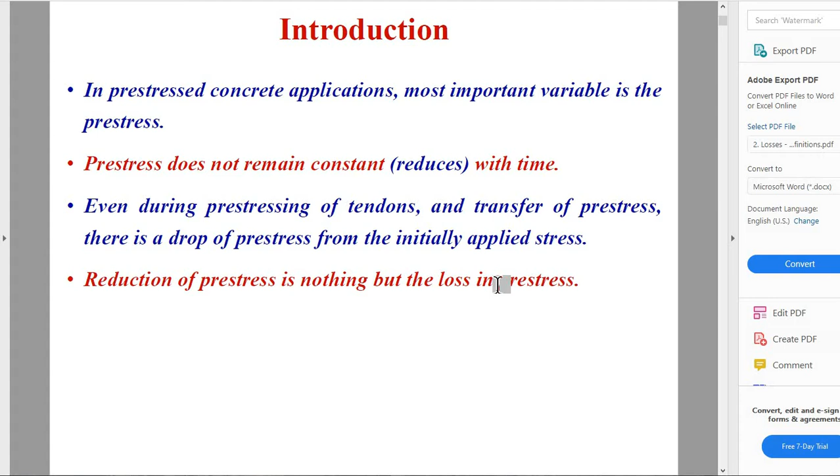Reduction of pre-stress is nothing but the loss in pre-stress. Early attempts to produce pre-stressed concrete were not successful due to loss of pre-stress transferred to concrete after a few years. Remember the word few years. So we have time-dependent losses.

Pre-stress loss is nothing but the reduction of initial applied pre-stress to an effective value. This initial applied pre-stress is the pressure obtained from the jacking equipment, which is the equipment that pulls the tendons. In other words, loss in pre-stress is the difference between initial pre-stress and the effective pre-stress that remains in a member. The effective pre-stress is the stress remaining in the tendons after removing the pre-stressing equipment and after the lock is placed.

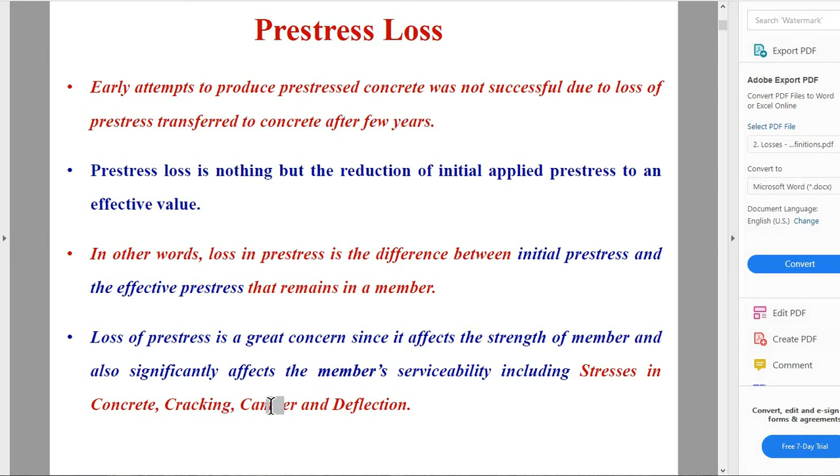Loss of pre-stress is a great concern since it affects the strength of the member and also significantly affects the member's serviceability, including stresses in concrete, cracking, camber, and deflection. When you talk about serviceability, these are terms of comfort. For example, we don't want a beam with large deflection, although it is safe. We also don't want a beam with visible cracks, although it is still structurally safe. That's what we call serviceability.

Loss of pre-stress is classified into two types: short-term or immediate, and long-term or time-dependent losses. Short-term, immediate losses occur during pre-stressing of tendons and transfer of pre-stress to the concrete member. Long-term, time-dependent losses occur during the service life of the structure.

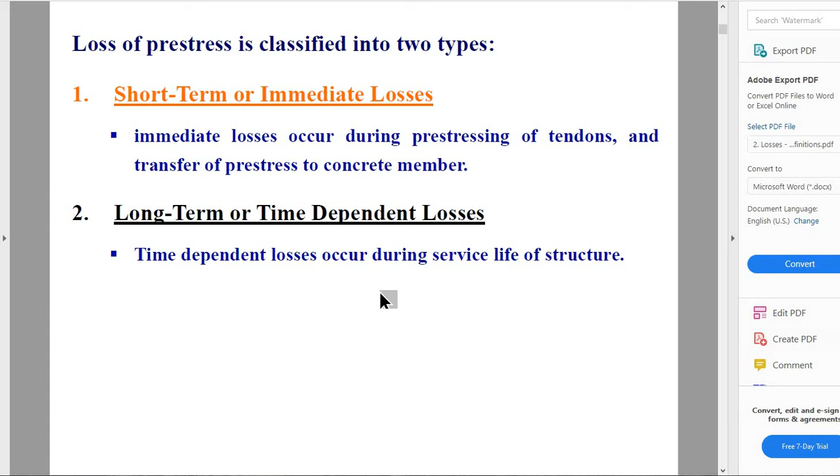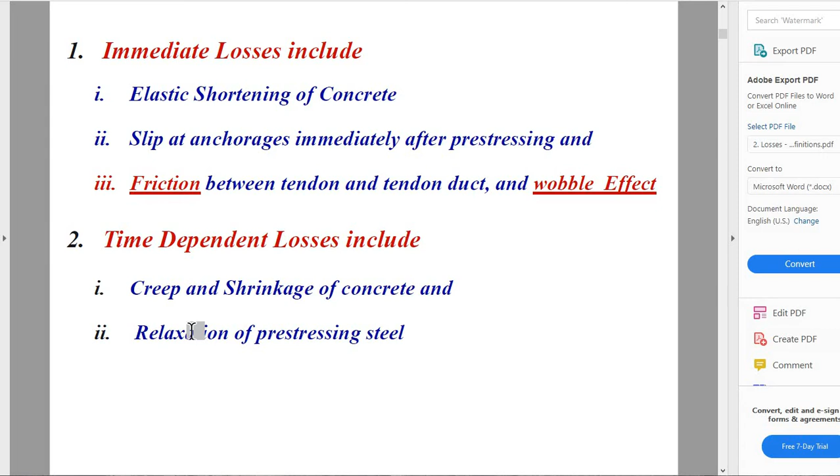Immediate losses include elastic shortening, slip at anchorage, friction between tendon and tendon duct, and wobble effect. Then we have creep and shrinkage, and relaxation of pre-stressing steel. So we have immediate and time-dependent losses, divided into two. We will solve all of those one by one.

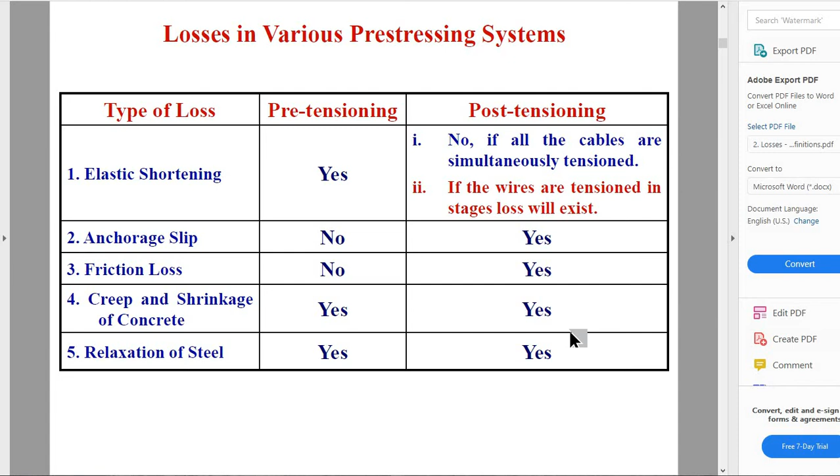Elastic shortening in pre-tensioned concrete: when the pre-stress is transferred to concrete, the member shortens and the pre-stressing steel also shortens, hence there is loss of pre-stress. This is the part where the concrete has hardened, and when you apply the pressure and cut the tendons, it means the tendons are now gripping the concrete, and the size or length of the concrete decreases. This is called elastic shortening.

In case of post-tensioning, if all the cables are tensioned simultaneously, there is no loss since the applied stress is recorded after the elastic shortening has completely occurred. If the cables are tensioned sequentially, there is loss in a tendon during subsequent stretching of other tendons.

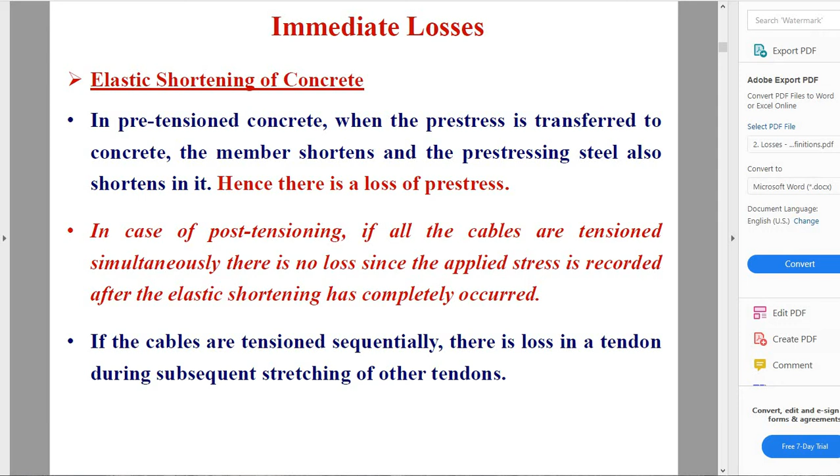Loss of pre-stress mainly depends on modular ratio and average stress in concrete at the level of steel. Loss due to elastic shortening is quantified by the drop in pre-stress in a tendon due to change in strain in the tendon. This change in strain in tendon is equal to the strain in concrete at the level of tendon due to pre-stressing force. This assumption is due to strain compatibility between concrete and steel.

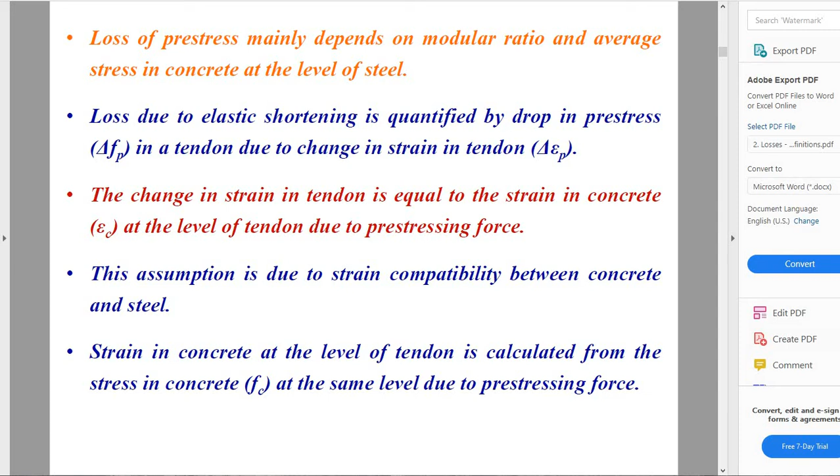Strain in concrete at the level of tendon is calculated from the stress in concrete at the same level due to pre-stressing force. Loss due to elastic shortening is quantified by the drop in pre-stress in the tendon due to strain in tendon. Change in strain in tendon is equal to strain in concrete at the level of tendon due to pre-stressing force, which is called strain compatibility between concrete and steel.

Strain in concrete at the level of tendon is calculated from the stress in concrete at the same level due to the pre-stressing force. A linear elastic relationship is used to calculate the strain from the stress.

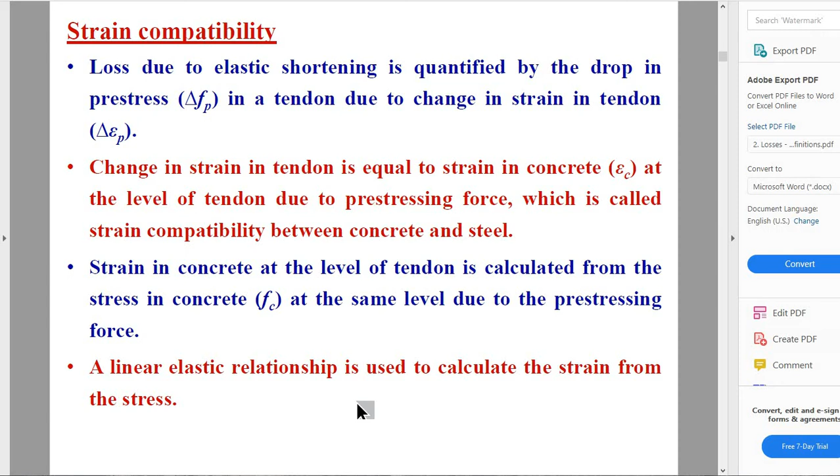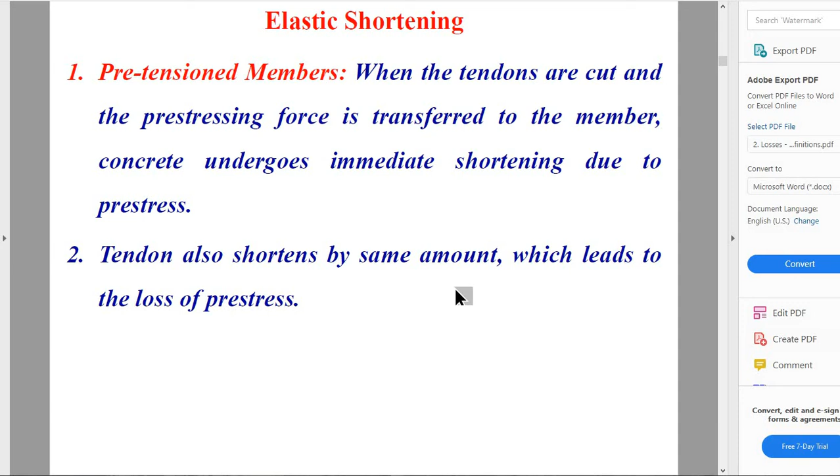For pre-tensioned members, when tendons are cut and the pre-stressing force is transferred to the member, concrete undergoes immediate shortening due to pre-stress. The tendon also shortens by the same amount, which leads to the loss of pre-stress.

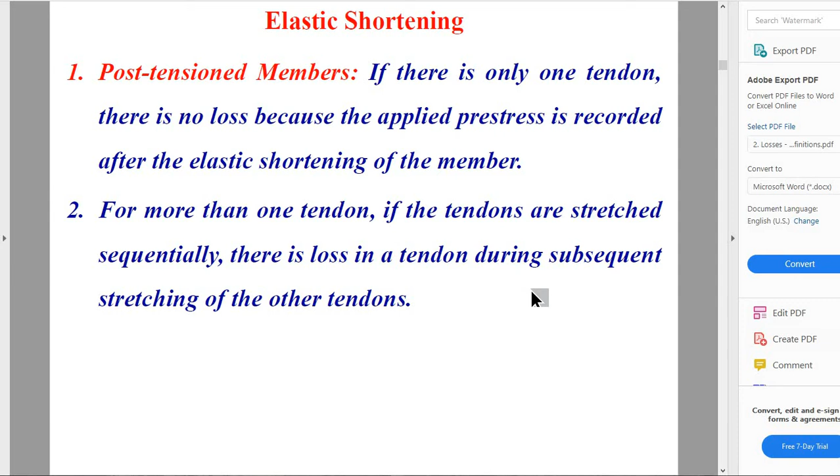For post-tensioned members, if there is only one tendon, there is no loss because the applied pre-stress is recorded after the elastic shortening of the member. For more than one tendon, if the tendons are stretched sequentially, there is loss in a tendon during subsequent stretching of the other tendons.

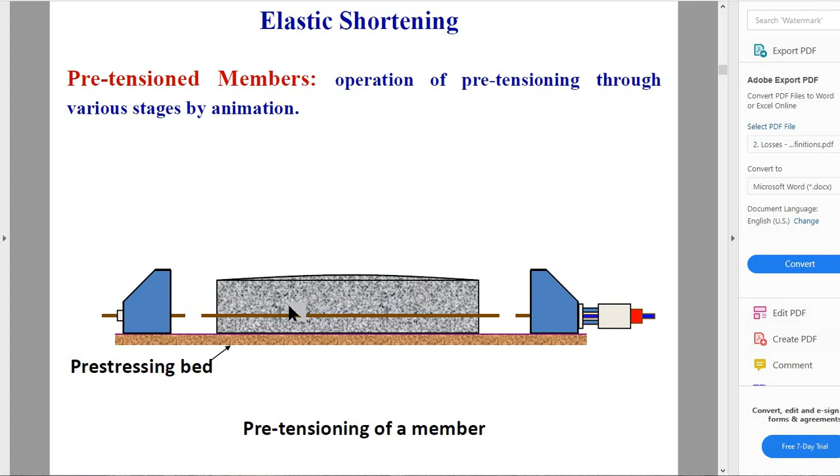That is called elastic shortening. So the length of the pre-stressing tendons also decreases. Notice that the strand is located at the bottom, at the middle of the beam, which is why you'll notice its deflection is upwards. In this other case, the tendon is somewhere in the middle.

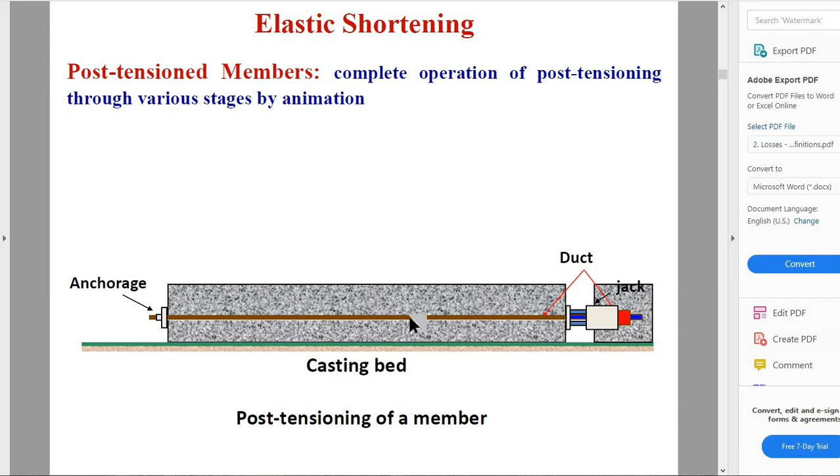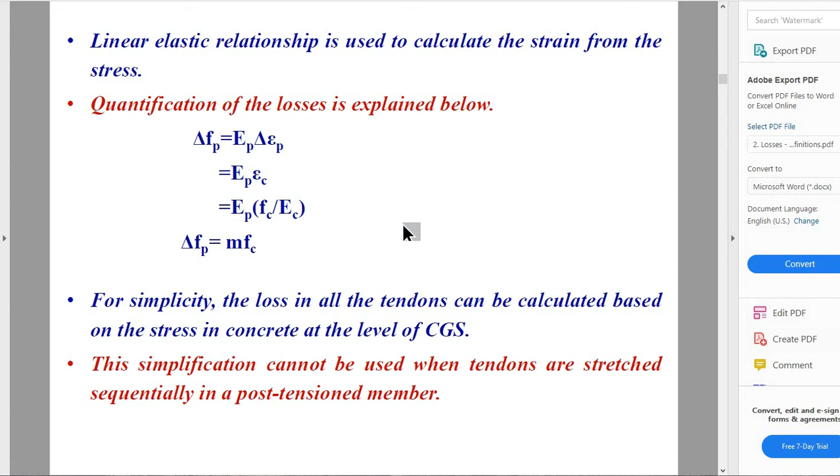Now we go to the linear elastic relationship used to calculate the strain from the stress. In our sample later, we have equations we'll use for elastic shortening.

Now let's go to anchorage slip. In most post-tensioning systems, when the tendon force is transferred from the jack to the anchoring ends, the friction wedges slip over a small distance.

These are the anchoring ends, the anchor, the mechanism or lock so that the tendons will remain stretched in the concrete. This is also what allows you to remove the jacking equipment.

Anchorage block also moves before it settles on concrete. Loss of pre-stress is due to the consequent reduction in the length of the tendon. A certain quantity of pre-stress is released due to this slip of wire through the anchorages.

The amount of slip depends on the type of wedge and stress in the wire. That's why, before locking the jacking force, they increase it slightly, because once you lock it, there are losses.

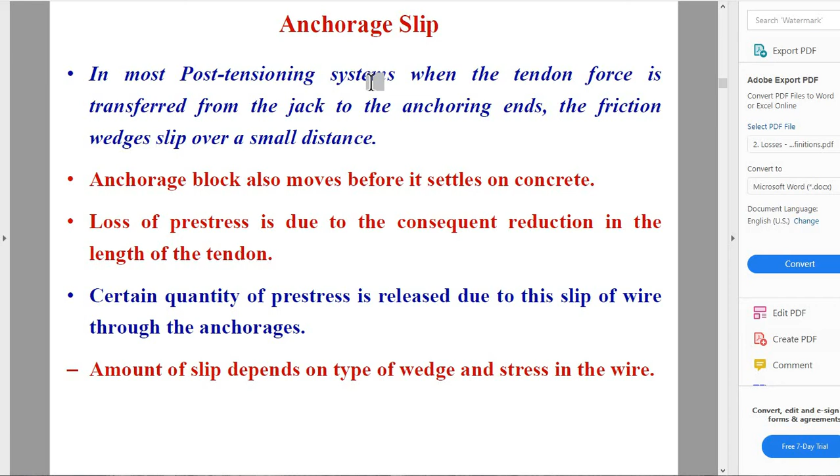The magnitude of slip can be known from tests or from the patents of the anchorage system. So each manufacturer of tendons and anchors has specifications listing these losses.

Loss of stress is caused by a definite total amount of shortening. Percentage loss is higher for shorter members. Due to setting of the anchorage block, the tendon shortens, and there develops a reverse friction. The effect of anchorage slip is present up to a certain length called the setting length.

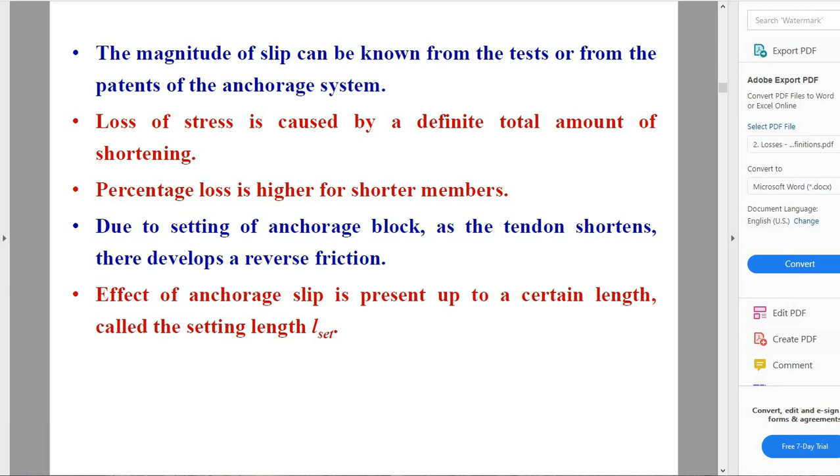Anchorage loss can be accounted for at the site by overextending the tendon during the pre-stressing operation by the amount of draw-in before anchorage. Later on, we have the computation of anchorage slip.

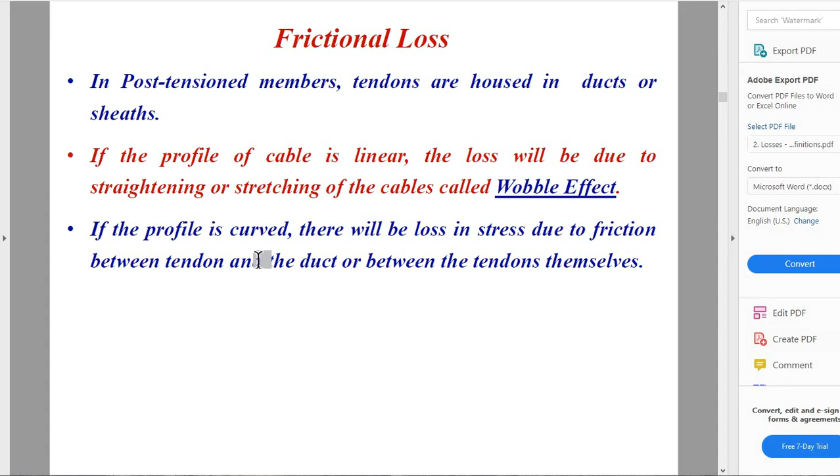If the profile of the cable is linear, the loss will be due to straightening or stretching of the cables, called the wobble effect. You consider the wobble effect when the cable or duct is parabolic. If the profile is curved, there will be loss in stress due to friction between the tendon and the duct, or between the tendons themselves.

For post-tension members, this is now friction. Friction is generated due to curvature of tendon and vertical component of the pre-stressing force.

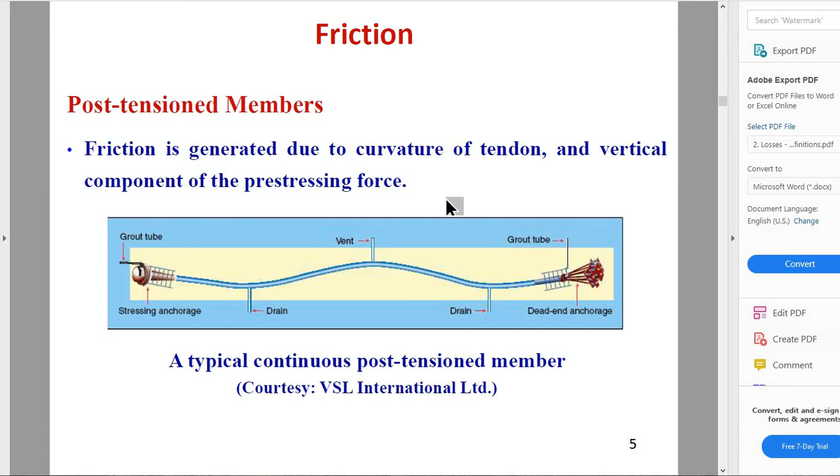This is also a figure. The magnitude of pre-stressing force, Px, at any distance x from the tensioning end follows an exponential function of this type. We will also have an example of this later on.

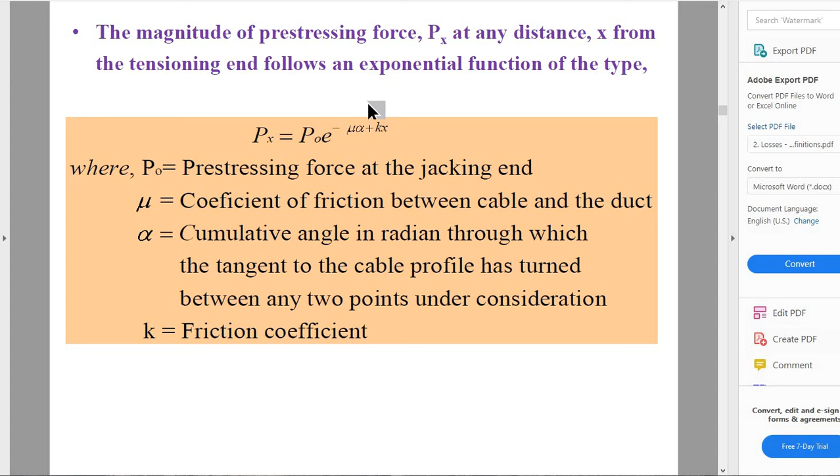And then we have time-dependent losses. These are the losses after years of service. We have creep of concrete: the time-dependent increase of deformation under sustained load due to creep. The prestress in tendons decreases with time.

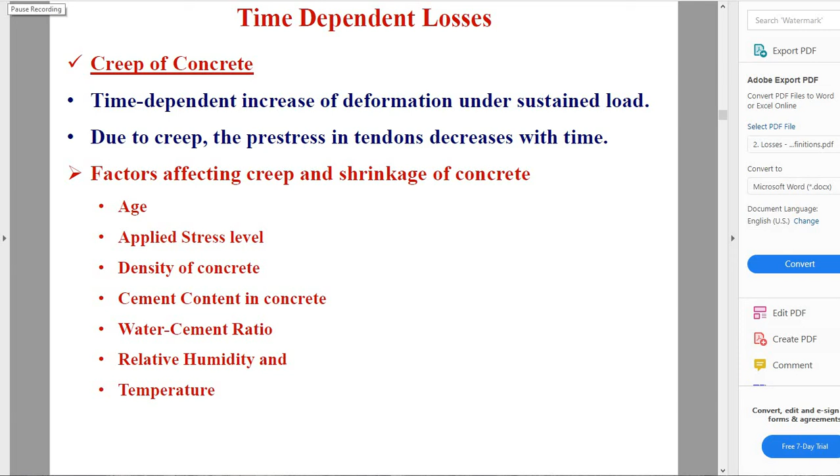Factors affecting creep and shrinkage of concrete: age, applied stress level, density of concrete, cement content in concrete, water-cement ratio, relative humidity, and temperature. For stress in concrete less than 1/3 of the characteristic strength, the ultimate creep strain is found to be proportional to the elastic strain.

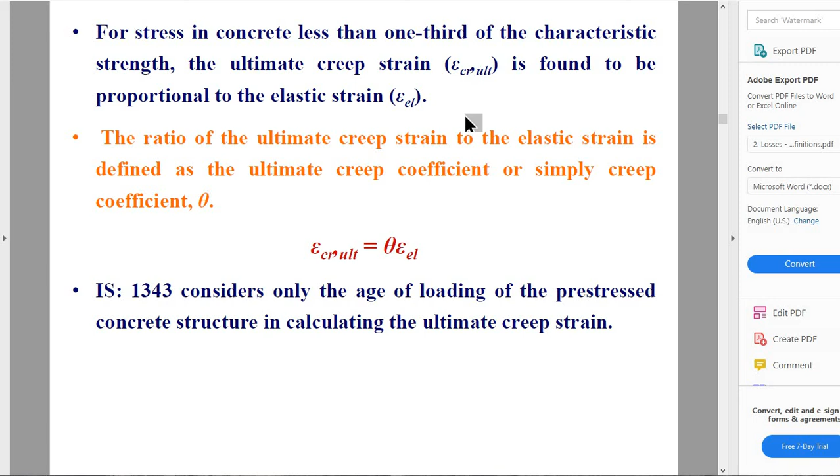Curing the concrete adequately and delaying the application of load provide long-term benefits with regards to durability, loss of pre-stress, and deflection. In special situations, detailed calculations may be necessary to monitor creep strain with time.

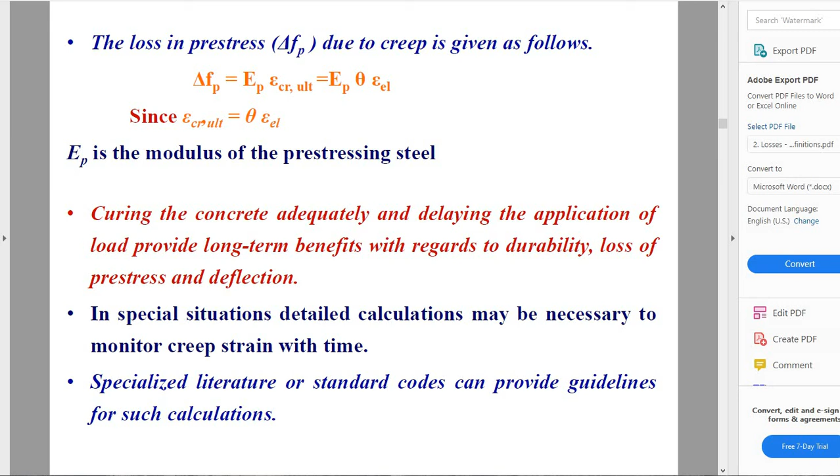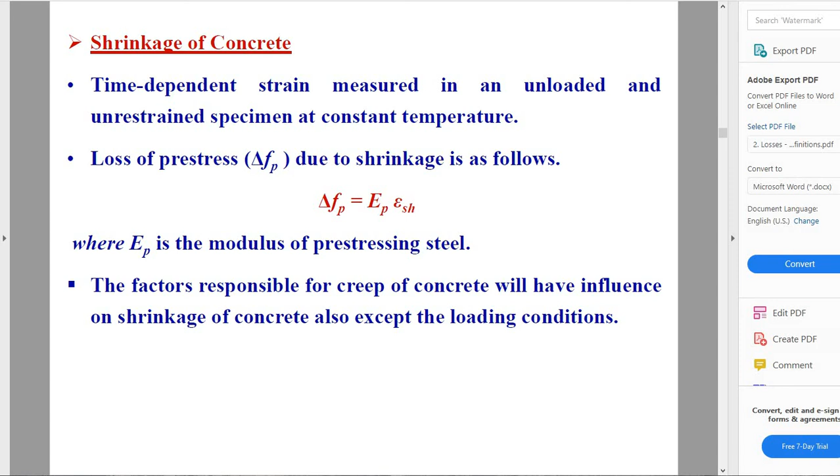And then we have relaxation. It is the reduction in stress with time at constant strain. The decrease in stress is due to the fact that some of the initial elastic strain is transformed into inelastic strain under constant strain. Stress decreases according to the remaining elastic strain.

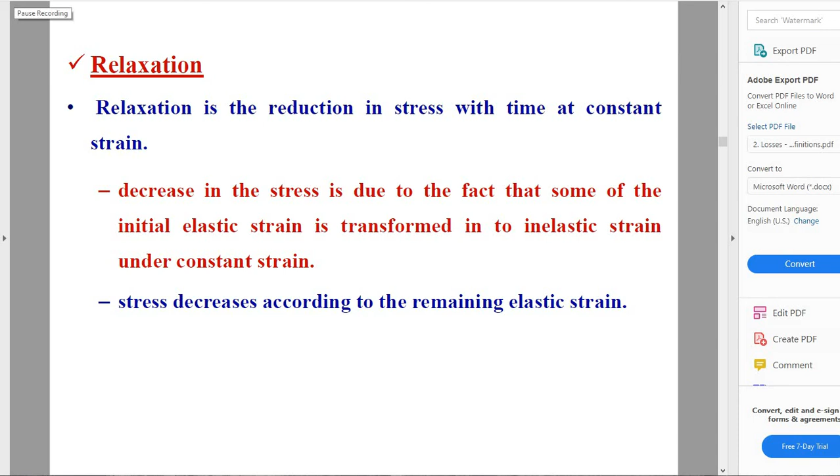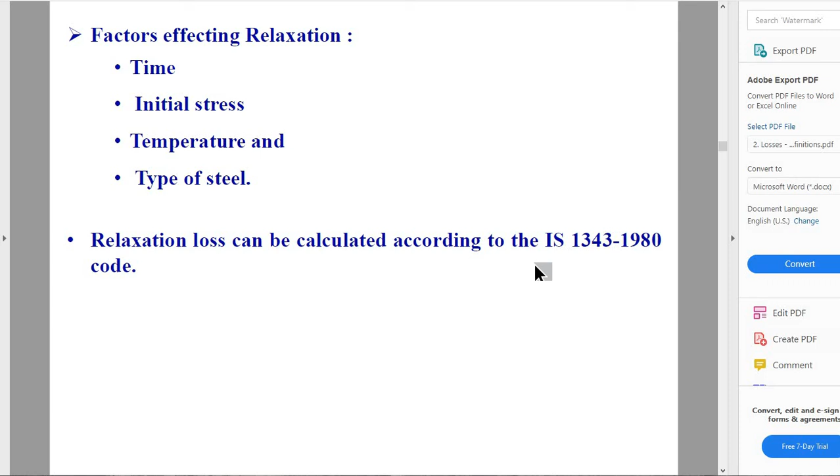We have factors affecting relaxation: time, initial stress, temperature, and type of steel. Relaxation loss can be calculated according to this.

And then for losses in pre-stress, we have geometric properties to solve: basic and transformed section properties.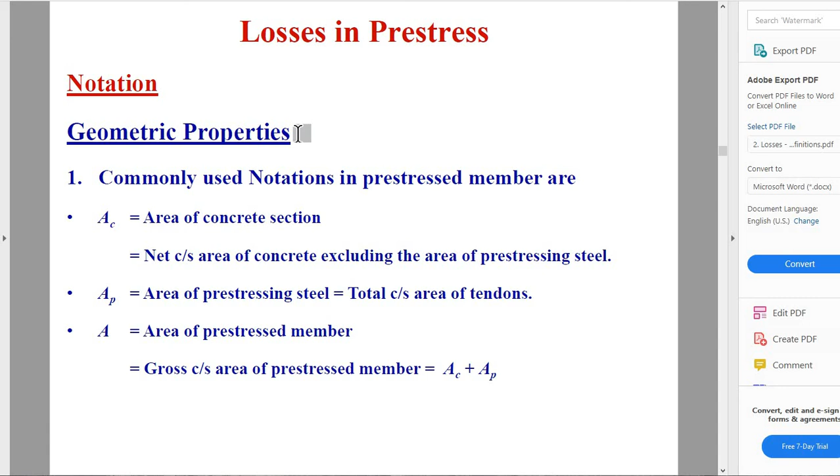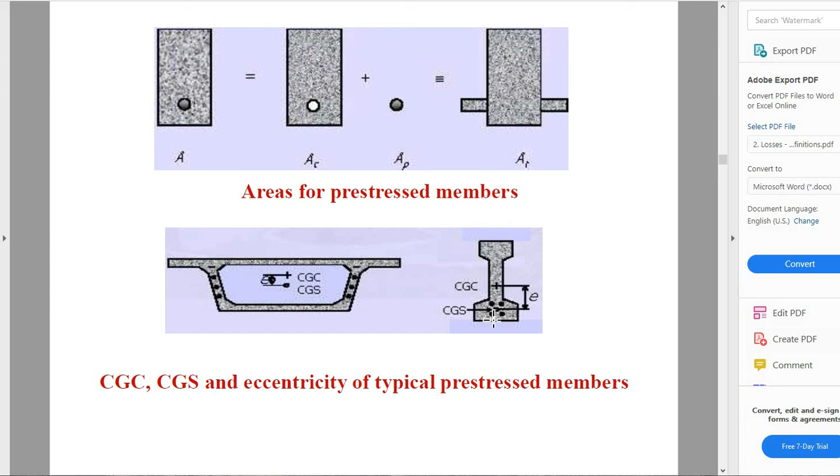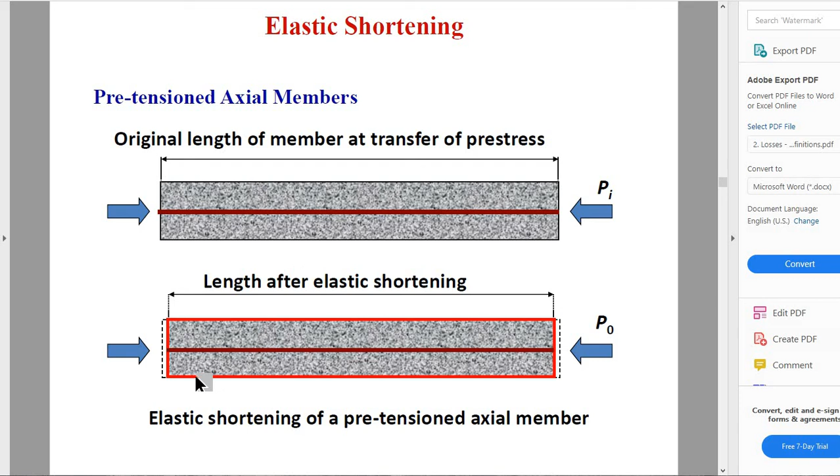The bottom is larger. We have here the figure for elastic shortening. This is the original length of the member at transfer of pre-stress. And then after some time, the section and length are reduced.

Creep of concrete is defined as the increase in deformation with time under constant load. Due to the creep of concrete, the pre-stress in the tendon is reduced with time.

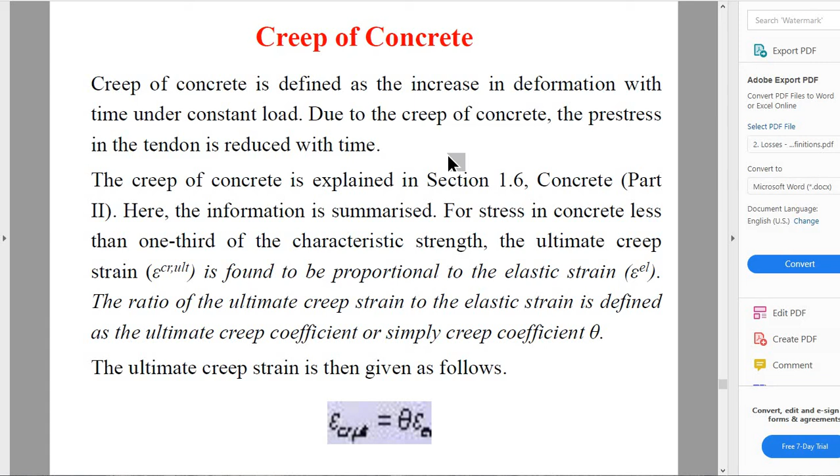Shrinkage of concrete is defined as the contraction due to loss of moisture. Due to the shrinkage of concrete, the pre-stress in the tendon is reduced with time.

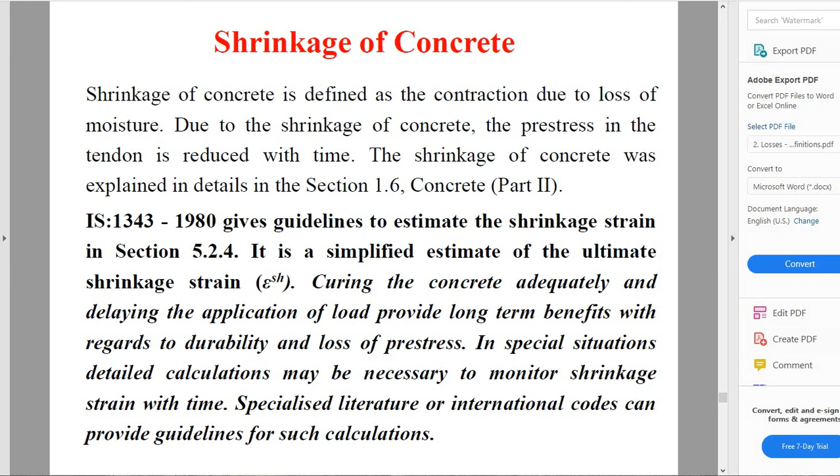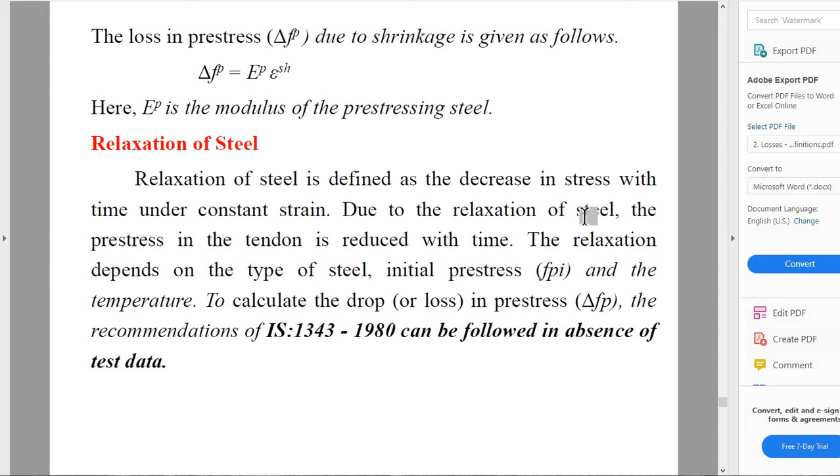Relaxation of steel is defined as the decrease in stress with time under constant strain. Due to the relaxation of steel, the pre-stress in the tendon is reduced with time. The losses of pre-stress due to creep and shrinkage of concrete and the relaxation of steel are all time-dependent and interrelated to each other.

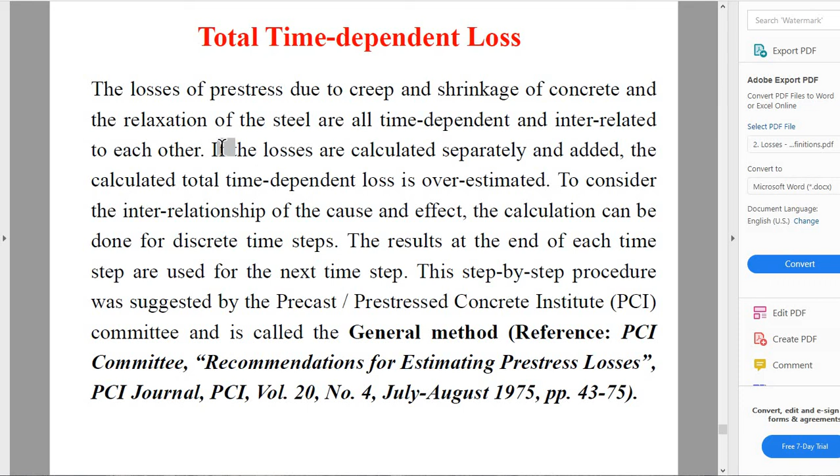In the pre-tensioning system, tendons are first tensioned between rigid anchor blocks cast in the ground. Concrete is subsequently placed and compacted to the required shape and size. Pre-tensioning methods rely on the bond developed between steel and the surrounding concrete. The tendons should be fully bonded over their entire length. After the concrete hardens, the tendons are released from the pre-tensioning bed and the pre-stress is transferred to the concrete.